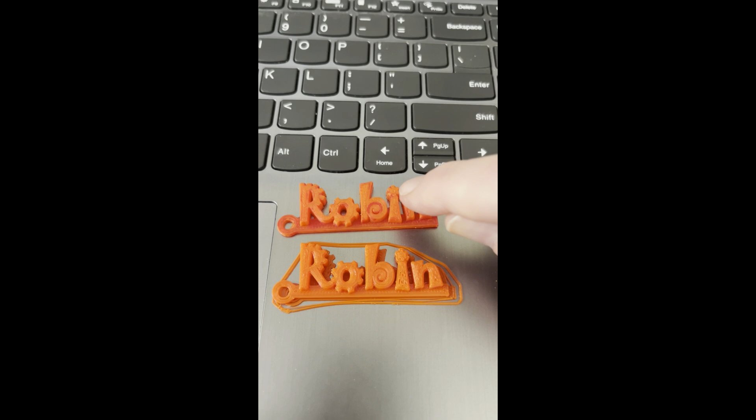And it managed to scooch over, so that wasn't good, but you can see that just a little bit of the dark red shadows around the edges of everything. It makes a big difference in how it looks.

This color, by the way, is Toybox's new habanero color. It's this really bright red. Okay, on to the video.

So in order to make a keychain like this with a custom font, you'll probably want an SVG file. You can also use some other files, but SVG is pretty easy to get. So you can use a free program called Inkscape.

It's at inkscape.org. You'll notice up here you can actually do some support for them if you'd like, but it's a free program. You download it right here, and that program's just a really free, easy, and yet powerful program to use to make SVG files.

If you have a Cricut or a Cameo Silhouette or another electronic cutter, you probably already have software that would do this. Or if you have CorelDRAW or Illustrator or anything like that, you already have software. But this is a nice free one that you can use.

This is Inkscape. So to get our lettering in there, we go to the text tool over here, click anywhere on the screen, and type in the word you want. That font is okay, but there are others I like a little better for this project.

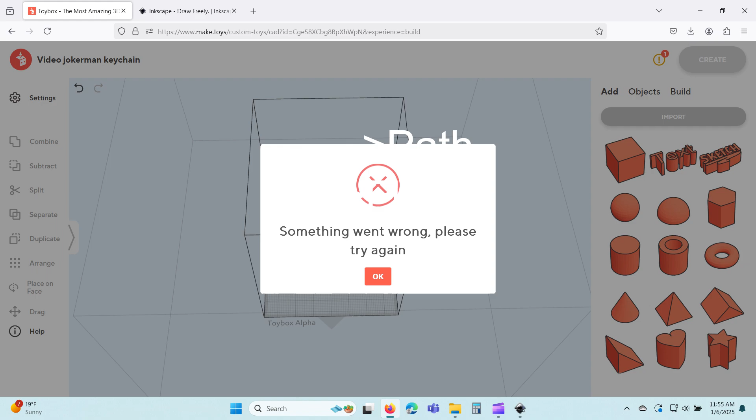So after you have flattened your image, you're going to go right here and you're going to pick the correct folder to put this in. So be sure that you find the folder that you want. I've got one in my 3D folder that I've made called Keychains, and I'm going to name this one Jokerman Robin Keychain.

All right, and then you're going to make sure you choose an SVG file. It could be the Inkscape SVG or just the regular one. And you're going to click on Save. So now you want to go to the Toybox app, and you'll go to Create, and then you'll scroll down a little bit and click on Build.

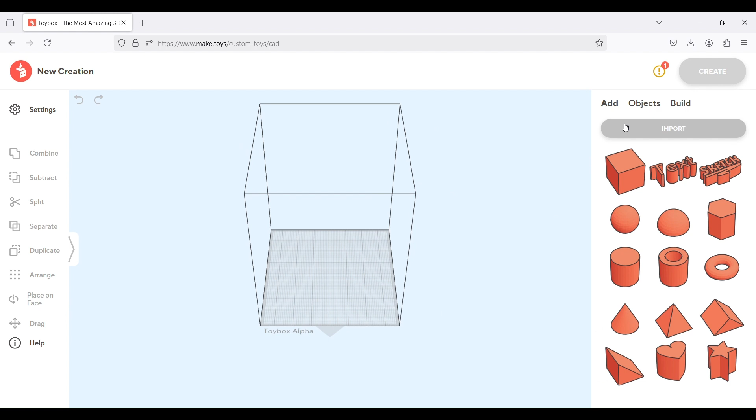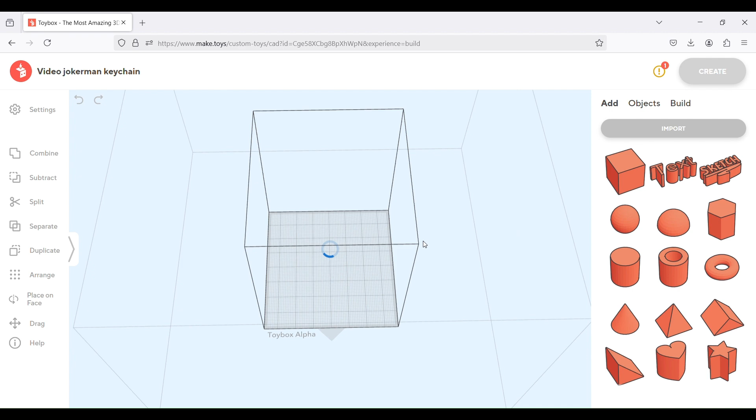To get our keychain made, we're going to go to our Creator space, which is where I am right now, and we're going to import. Right here, we're going to import the file we just made, which I happen to know is in my keychain folder called Jokerman Robin Keychain SVG. And since we flattened it, yeah, there it is.

Now I'm a mouse user, and I want you guys to think hard about using a mouse because it really makes things easy. See how I can zoom around the left with the left click, move side to side with the right click, and then when I use shift keys with the right and left and all that, I can actually see things at different angles.

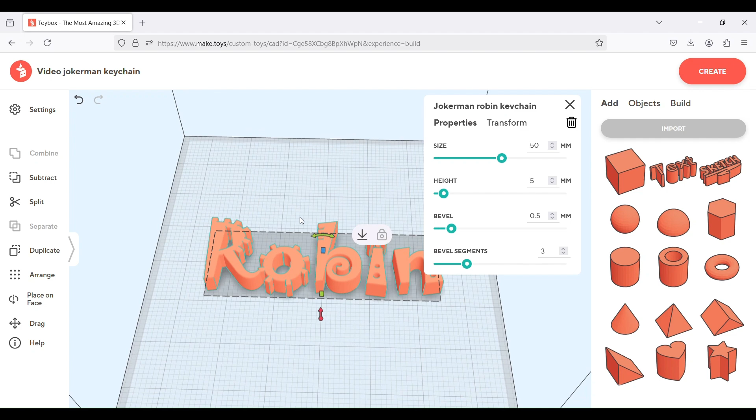So you can also zoom in with just scroll in the center of your mouse and zoom out. So it's pretty cool. All right, so there's some fun stuff we can do. If you don't see this right here, your properties, you will see them when you click on the pencil. And we can actually add some really cool effects here, so we can add a bevel.

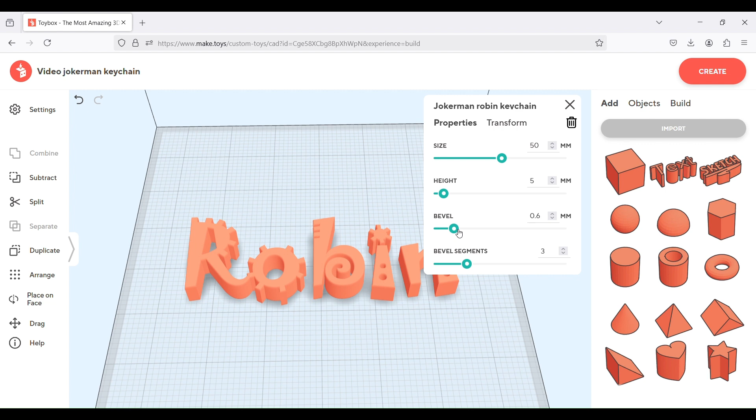See how that's going to make it a little fatter. We can change how many segments are in that bevel. So that would be like a 1 segment bevel - it's kind of a hard look to it. I like mine a bit softer, so I'm going to add some more bevel segments here.

My biggest thing I really wanted to do here was to make sure that the i and the dot over the i were connected together. So that was kind of in my mind. There's other ways we could connect it, but that was an easy way to do it - make that bevel bigger.

So that's really cool. All right, so if we printed this right now, we would have R and O together, and then B and I and N would be separate pieces. So we need to connect all that together.

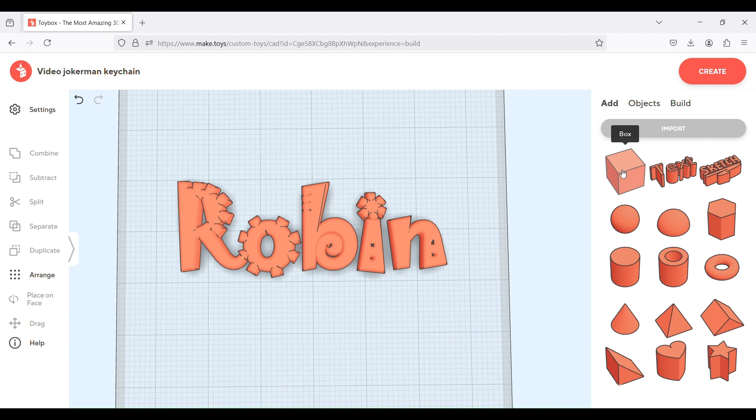I'm going to use a simple box over here, and I'm going to make that fit. See how the little handles you can move? I'm going to say about 54 millimeters is probably about right. Get rid of that so I can see. And notice how tall that is - that's not good, we want it shorter.

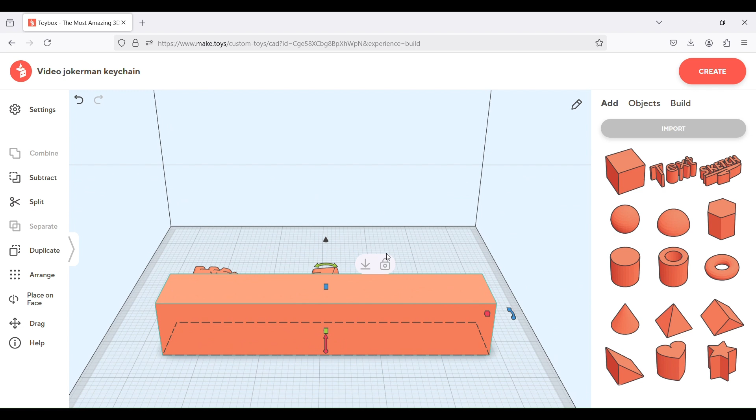So I'm going to bring that down to 2 millimeters. 2 millimeters is a really nice round number that I have found over the years works really well - it's pretty thin, but not super flimsy. So we could do maybe 6 millimeters or 5 even for that.

And I can move it over a little bit more. That looks pretty good to me. Let's see what that... yeah, looks good.

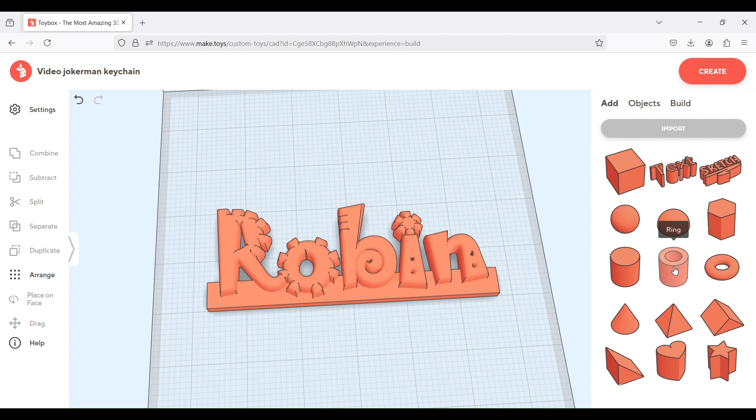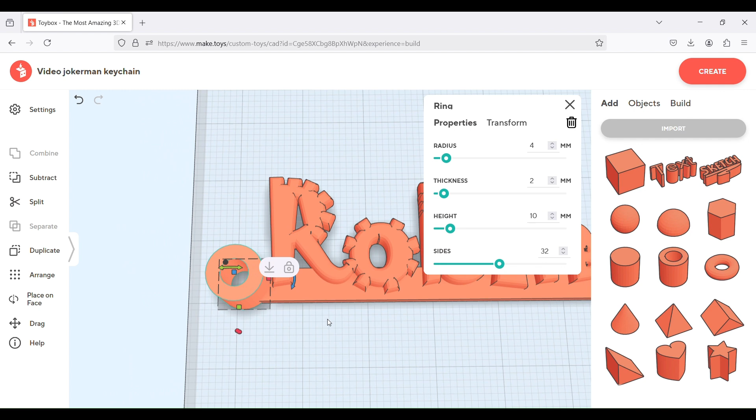I'm going to add a ring for our keychain. Just click over here for ring. This is actually a pretty good, decent size, but it looks kind of big compared to this, so I'm going to do about a 4 millimeter radius on that, which makes it an 8 millimeter diameter - of course, that's half of the diameter. And that needs to be short as well, so I'm going to bring that down to 2.

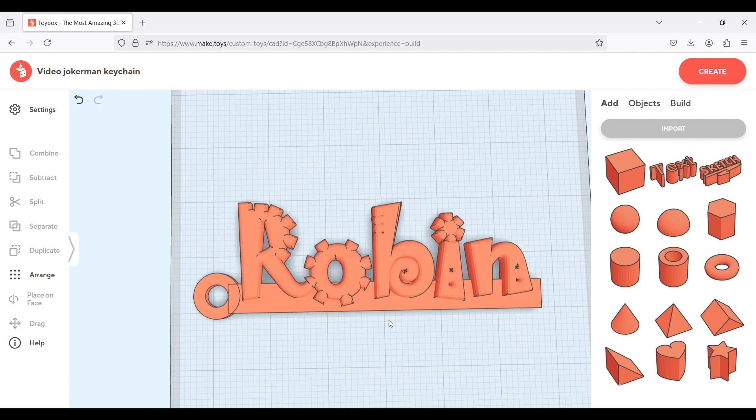Now, right now we could print this out, and remember at the beginning where I showed you how it shifted? If you look at the underside, you'll see what probably happened was this was not very smooth on the underside, so it was trying really hard to print well, but it had a hard time. So I'm going to actually make this go down below the surface. When I do that, up here in my properties, I go to transform, and I go down. Now, it won't let me do that if I have grounding selected, so I'm going to deselect that. I've got my name selected, and I'm going to go down.

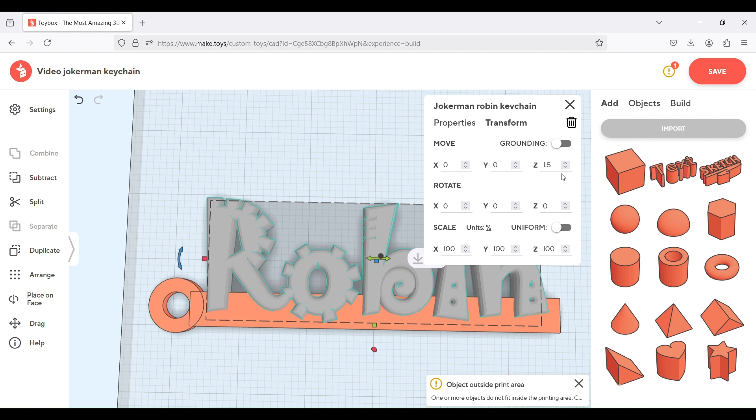That's down 1 millimeter. I'm going to try going down 2 millimeters, okay? And it says, hey, this isn't going to print. So if you try to print this right now, it would really not do well at all. And I do want my lettering taller, so I'm going to go ahead and bring that up 2 more - let's see how that looks.

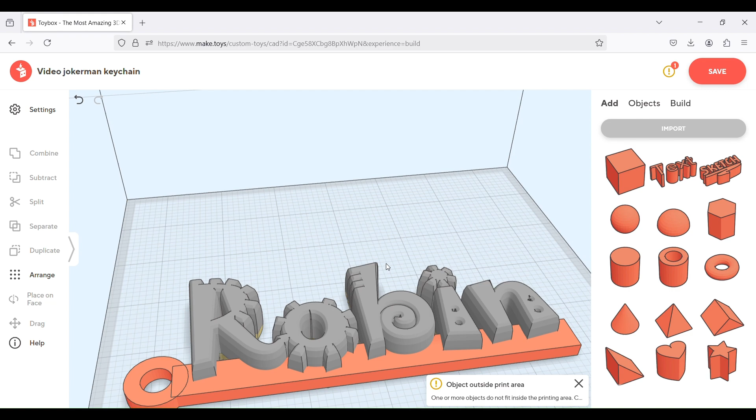Oh yeah, that looks pretty good. I like that. That looks pretty good.

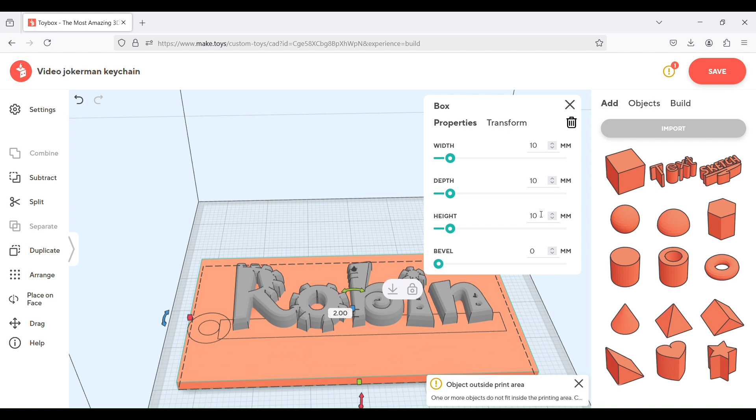But I can't just leave it all hanging out down there. I'm going to shave off the bottom, so I'm going to use another box. And this time this box is going to be big enough to cover the whole entire word, and I'm going to make it 2 millimeters high. And I'm going to bring it down below so it shaves off the bottom. So here again in my transform, I'm going to take that down 2, which is the same amount that I took down the other. And then I can use the subtract tool over here.

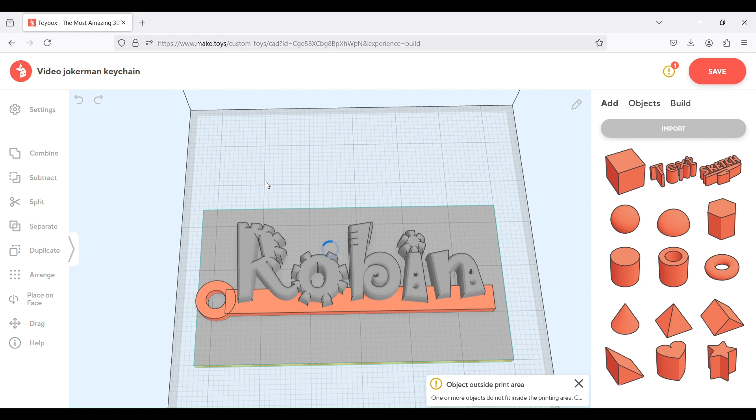It'll take a minute because it's shaving off the bottom of the name here, so it'll take a minute. There you go, and that looks pretty good.

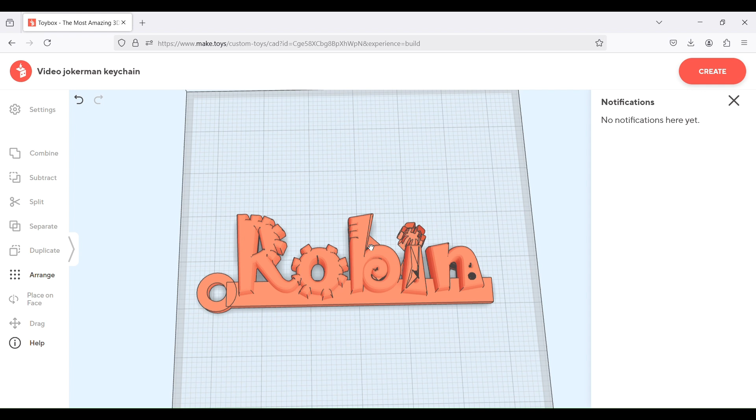Now it's telling me the object is not watertight. You see these holes that are in here? So yeah, that's not a great thing. We can try to fix this when we click here - we can fix it, but it really makes a mess most of the time. See how it kind of added these weird things? Remember my Control Z? That's undo. Another way to undo would be right here - undo and redo.

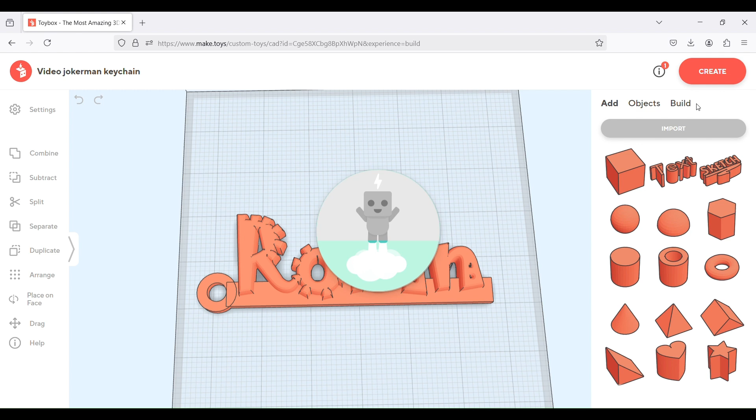So I'm just going to leave it alone as far as it not being watertight - I happen to know it's going to be fine. And I'm going to click on Create. Now, before I clicked on Create, I could have chosen in the Build section up here, I could have chosen to print this out at a better quality, which is probably what I would do.

And it looks pretty good, so it's ready to print. But if you want to go back, you can always go back to Edit. You can always go to Build, and you can choose a better quality or the fast option.